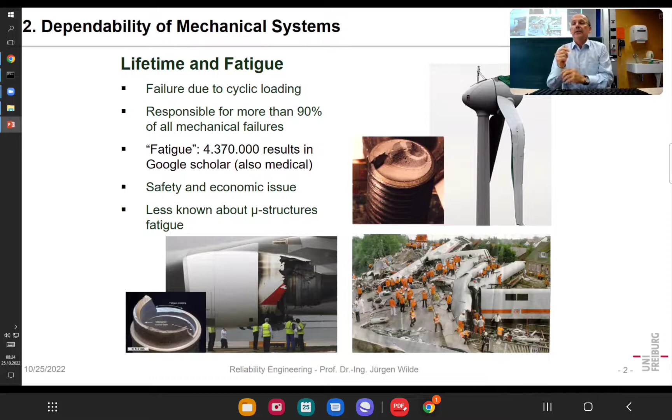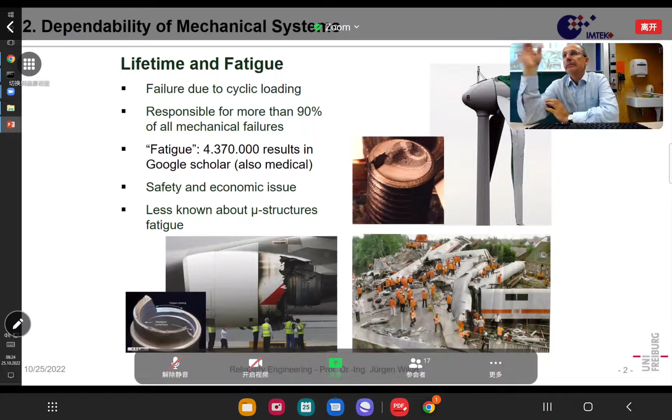That means it suddenly fails immediately, but the complete process of failure has taken considerable time. There are such examples for wind turbines, or here that is a jet engine. What can happen is that one of the rotor blades gets loose, because the support is breaking, and such a turbine has roughly 10,000 rotations per minute, so centrifugal forces are considerable. They can not only destroy that turbine, but can destroy the complete aircraft if they go inside the aircraft rather than outside. So that's very important.

When you look for fatigue, you find very many answers, for instance, in Google Scholar. Of course, fatigue is also a phenomenon in psychology or medical science, but here we talk about mechanical fatigue. It is said that fatigue is responsible for more than 90% of all mechanical failures.

Today we are going to deal with fatigue. What you see here is an accident at the end of the 1990s in Germany, somewhere near Hanover, in the northern part. Here an ICE crashed. You see it crashed completely. And that was also a fatigue problem.

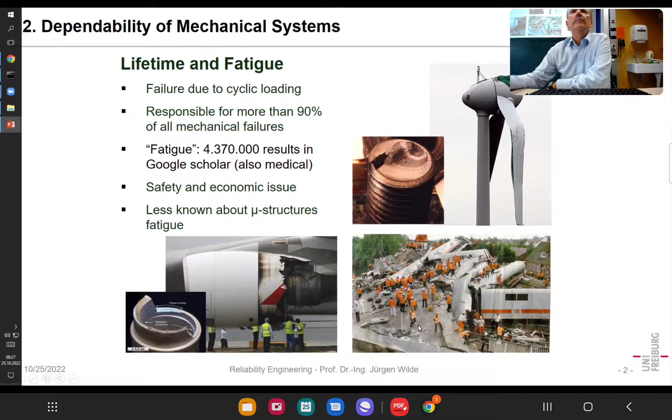The strange thing is that people thought fatigue in railroad applications was mainly solved by the end of the 19th century. Also, the theoretical foundation for treatment of fatigue was given, but anyway, 90 years later, again, such an accident appeared.

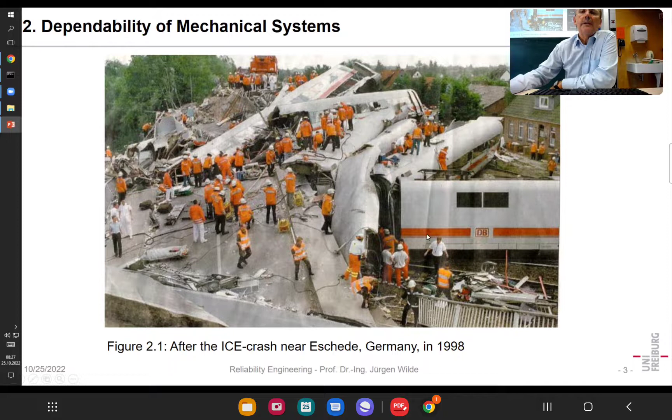Here you can see in more detail. Here's a small house, they have a garden, and suddenly you find such a car of the railroad in your garden. Here is a bridge, that bridge collapsed. That was the main thing which made the accident so severe, that the bridge collapsed on part of that train.

But now let's have a more detailed description. This was 1998, an ICE, the first generation. It had a speed of roughly 200 kilometers per hour, and what it had was a broken wheel.

That wheel was a two-part construction. That's a railroad wheel, maybe it's more round than shown here. Also, a wheel gets some kind of wavy surface over time, so it gets some ripples. Also, the rail gets ripples, and so from time to time it's turned down to make it smooth again. Otherwise, the ripples lead to much noise and discomfort.

Also, here in between is some rubber layer, and that rubber layer leads to the fact that the contact area has only a limited thickness. When it's turned down, it becomes thinner and thinner. And on the other hand, from the backside here, cracks developed.

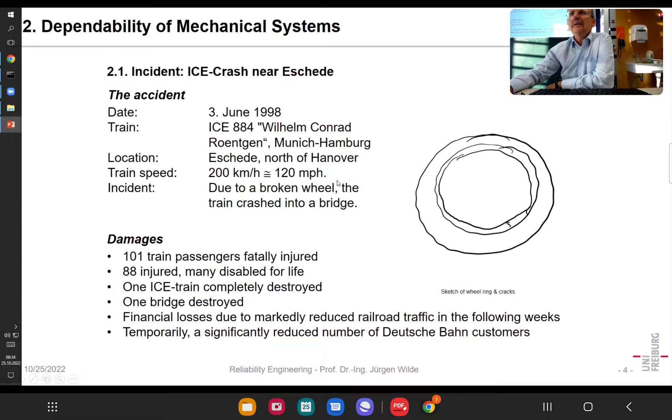So generally, if it's just a railroad wheel, you can say that was bad luck. But what will you say when something happens in a nuclear power station, which is much more complicated, and here it was just one mechanical part failing? I think that is something which should not have happened and could have been avoided.

The background is in the lecture notes. Now let's have a look at what fatigue is.

Normally when we test materials, we take some rod and pull on it, typically with a constant velocity, meaning a percent of strain per minute or so. Over time, as strain increases, the load goes up, and in almost any material you reach the ultimate tensile strength. Then it tears, and the force goes down because it's ripped apart.

This can depend on the material. For instance, a material with a higher Young's modulus evidently has less plastic deformation. So that's normally how materials are tested.

The first thing you say is, if a part is weaker than the force it has to tolerate, then it's no use. It would break immediately—you sit on that chair and it breaks down. So that's the first design criteria.

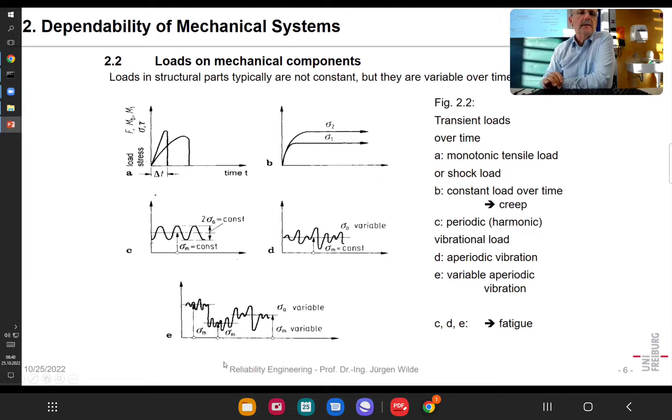So the question: will the loading type have an influence on lifetime and reliability? We have constant, monotonic, cyclic, or variable loads. What is a correct property which describes the load here? And what is fatigue also? These could be questions in an oral exam.

And yes, the load on a part is normally measured as a force in Newton. When we talk about material loads, we talk about mechanical stress, which is force per cross-sectional area. In that way, we are on a level where the strength of the material is relevant, not so much the breaking force of the part, because that is size dependent. And in that way, typically properties in mechanics are treated on the base of stress, Newton per square millimeter in German, or megapascal in English or international.

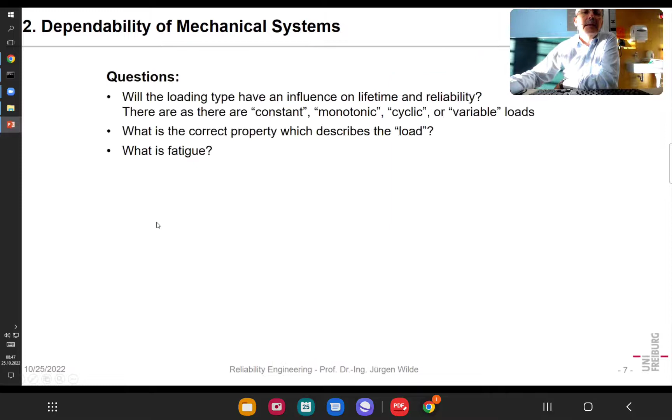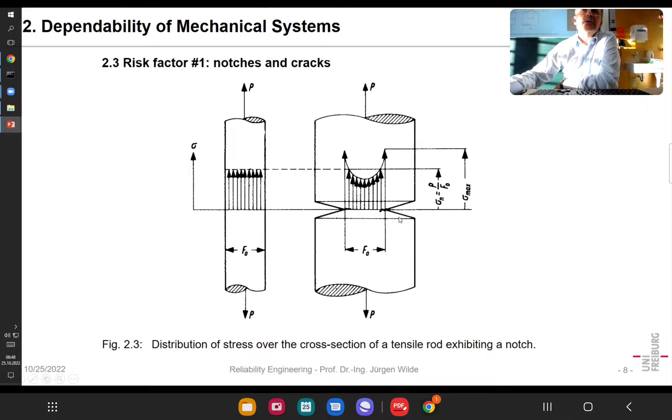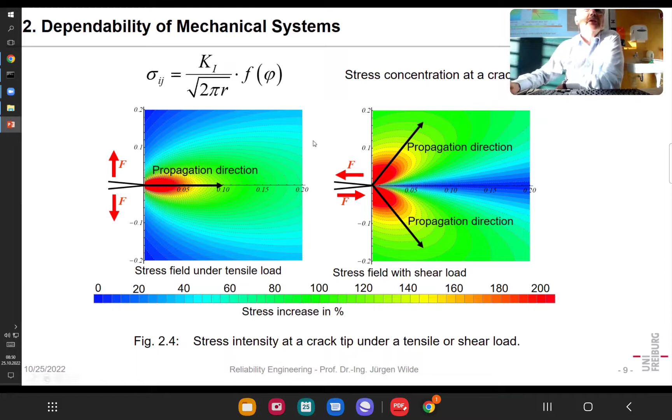I would not go into details because there are other lectures, especially on fracture mechanics, so that's not the aim here, but more to demonstrate that there is a big effect of such cracks. Again, here is that angle - we don't really need that formula.

What is maybe more important is that we have a stress vector. That's just when we take a 2D cut, so we have sigma x, sigma y, and some shear stress, all described by the so-called Sneddon equations. Sneddon was an Englishman who did that analytical calculation, I think around 1920 or so. What is important is, as I said, the stress is proportional to the inverse of the square root of the distance from the crack tip.

But on top of that, the stress scales with the nominal stress - that's just force divided by the complete area - multiplied with a factor that is the square root of pi times the crack length. In that way, that defines the stress intensity and the position around the crack, so that stress field can be computed.

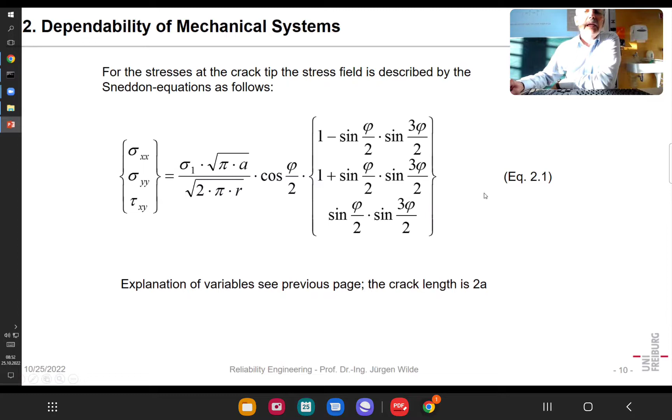Generally, you can say that stress concentration, with these geometry factors, can be described for all representative cases as the nominal stress multiplied with the square root of pi times the crack length - that's the length from the surface of the part to the tip of the crack. Q is a geometry factor depending on the special case. For us here, Q is by definition 1, but it can be between 0.7 and 2.5.

In that way, we have another failure criterion. Normally we say when the normal stress is higher than the ultimate tensile stress, it will fail. But if the part has a crack, it will fail when the K1 factor is larger than or equal to the K1C factor. Ultimate tensile strength is a material property, and K1C you can call the critical stress intensity, also called fracture toughness - that's a material property. So again, the criterion is: is the load higher than the strength, it will fail.

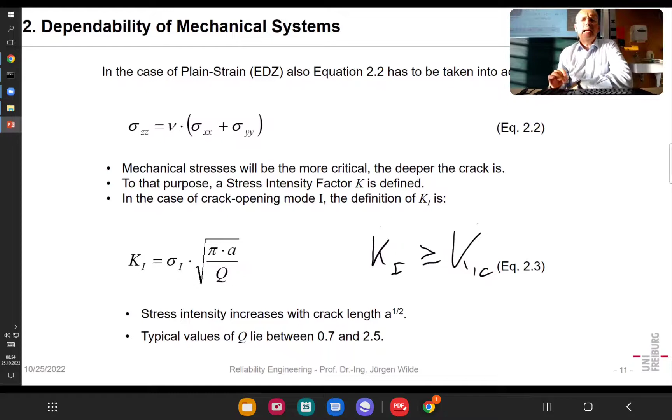Okay, here we have some examples. In fact, I'm not really working in mechanical engineering, but we did lots of work on strength of silicon. What's the strength of silicon? Does someone have an idea how many megapascal silicon can tolerate?

What do you think? Maybe we start with something different. That's also something you should know. You sit on a chair, and that is made of some steel pipe.

The strength of such a steel pipe in megapascal or in Newton per square millimeter - what's the strength of such steel? Give me a value.

Let's make it another way around. You have a string of steel wire, and you hang it here from the ceiling, and you put on a weight, 1 square millimeter of steel wire. How many kilos can you hang to it? Just give me an idea.

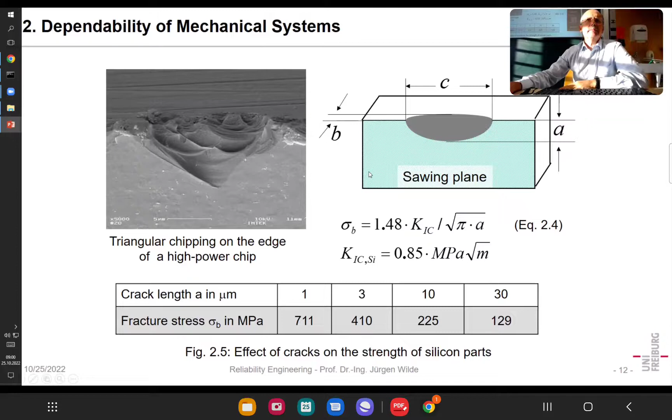And the second is we have the phenomenon of fatigue, and fatigue means we cannot just assume the ultimate tensile strength, but the value of strength which is tolerated is significantly lower. And when we still have a crack, it's lowered again.

So imagine you have a paper clip of, yeah, you know that paper clip, and you bend it. You can bend it a little and it snaps back, that's its task. You bend it too much and it snaps back only partly. That means you were beyond the yield point of that material. And still, when you really deform it, then you could break it. And the question is, why is in many constructions not the ultimate tensile stress used as a design criterion, but the yield strength of that material? Why is it so?

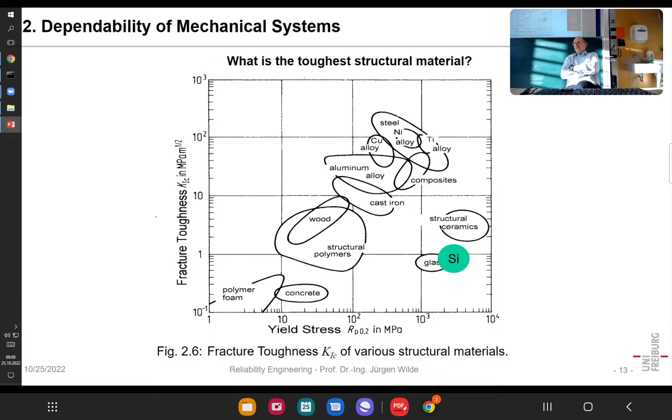The best nowadays are carbon fiber reinforced polymers. You can see that on Formula One race cars, for instance. Up to the 1970s, every season a few race car drivers were killed, and that doesn't happen anymore. One of the main reasons is the carbon fiber reinforced so-called monocoque construction, which is extremely strong and which can also be built in a way that it takes up a lot of energy. In that way, that's a safe construction.

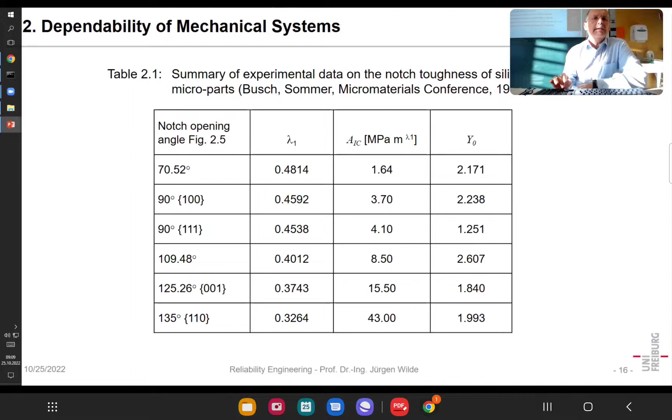Okay, we have seen that with the notches. I will go over that, that's not so important. But now let's come to fatigue.

There are two persons which are important - in the Anglo-Saxon area it's Mr. Basquin, and in Germany it's Mr. Wöhler. Wöhler did his work between 1870 and 1890 or so, and he worked in an office that was part of the railroad system. The main problems at that time were three: breaking of axles, breaking of wheels, breaking of rails, and the fourth thing is explosion of steel vessels.

Okay, the last is something like the action of a bomb, you could say. And that was all due to poor understanding of materials, not understanding the effect of cracks. Also, steels at that time were quite bad—they had many inclusions, and an internal inclusion is the same as a crack.

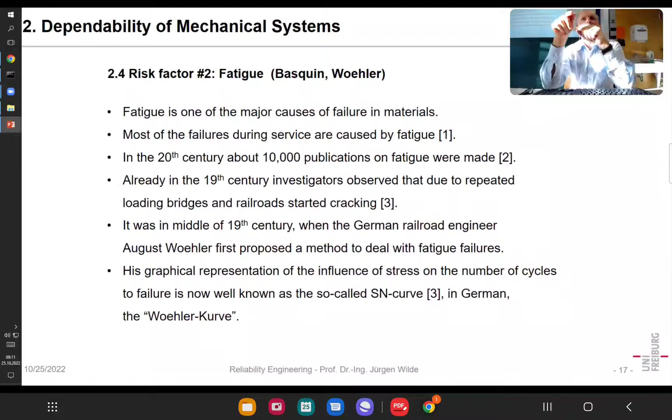That was important. By 1870, people didn't know anything about fatigue. Mr. Wöhler started from scratch. First of all, he thought about what it might be, and he built a machine in order to do dynamic testing. That means you can put an alternating load on a part, and depending on the load, determine how often you can have that loading and unloading, or reversion of the stress.

Here, the initial experiment was just to go to a positive and a negative stress—tension, compression, tension, compression. How do we accomplish that most easily? We can either take some bending bar and have it vibrate in some way, or we take a rod, bend it, and turn it at that time. And so we also get some symmetric tension-compression.

So, Mr. Wöhler found out, when you do your experiment, what is the stress level for the stress amplitude you start with? You cannot be larger than what? You cannot be larger than ultimate tensile strength. And you could also say, when you go to ultimate tensile strength, or better, yield strength, how many cycles will you have? You can have—you destroy it, so you have half a cycle.

That's not really fatigue, but you could say here your curve will start—half a cycle, yield strength. And then the stress is reduced, and you can already get—where is my mouse here? Here, you can get on that curve; when you want to investigate the material, maybe 7 specimens around that are already sufficient.

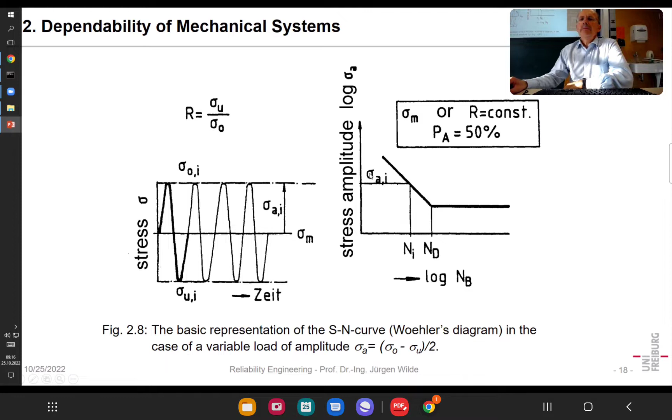More or less, you often find it—we will see more details. So generally in fatigue, what happens? Normally when you load it, you have a crack-free phase when it's a new material. And sometimes, as I said, you already have inclusions—for instance, some oxides or so in steels—and that means you do not have that crack-free phase.

But in a good material, you have it, and then after a certain time, you have crack initiation. Crack initiation means you have some surface profile where the step size of such a profile is in the micrometer region. You can see that, for instance, when you have a polished part of steel, which is really polished, and then after a certain time, you see some kind of weak pattern on the surface. And when this pattern becomes stronger, you get a crack, which is more a crack by definition.

You cannot say here that's a point where it's just that surface pattern, and here that's a crack—it's more a sliding transition. But in the end, engineers take something like an engineering crack, which means the part has already become a little weaker, a few percent weaker, and that is a crack by definition.

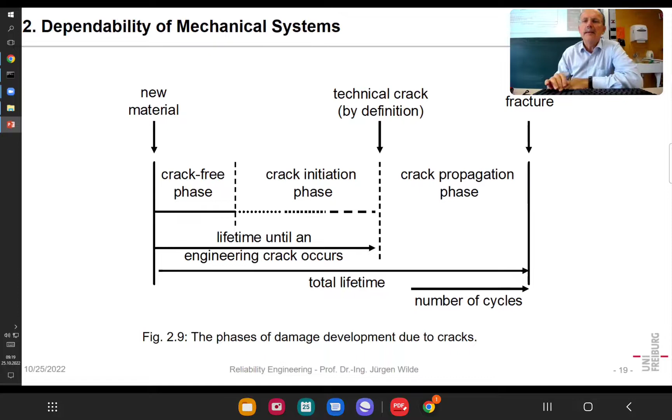So typically in a fatigue problem, you look at the cracked surface and you always find two areas: the fatigue area and the final crack area. And in that way, those are the phases of crack.

It's also interesting, depending on when we have a component with a crack, if we have some variable load, it can lead to fatigue or over time to creep. When we just pull, depending on the toughness, we have either a ductile fracture, meaning it takes lots of energy, or a brittle fracture, where all of the energy just goes into the crack. Ductile means all of the energy goes into the complete part. And what we can also have is something tricky: an arrested crack.

Where do we have cracks? In tension or compression? Yes, in tension. And sometimes in a 3D part, a crack runs into an area with compressive load - that's when we have a complex stress field. The crack just remains there because under pure compression, it cannot extend anymore. So that's an arrested crack. We have many possibilities.

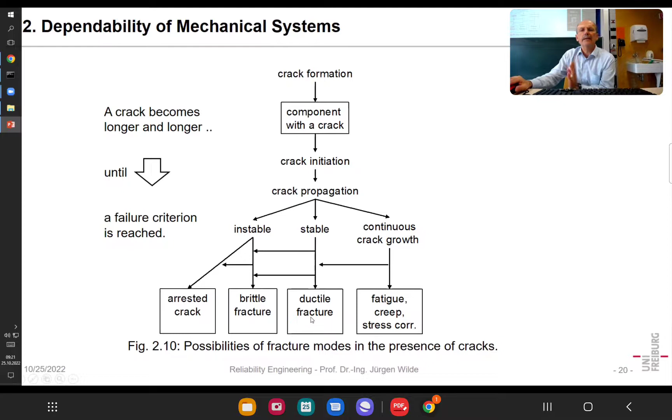So that's quite complex. In the end, we already have that curve. We can call it a Basquin's curve, or it's also often called an SN curve - stress versus number of cycles to failure. That stress level below which a part can live until eternity is the so-called endurance limit. Typically that starts from 1 million to 10 million cycles, or 10 to the power of 6 to 10 to the power of 7.

So here, in the beginning, you have something like the yield strength at half a cycle, and in that way, the endurance limit is often somewhere around 50% of yield strength. So in the end, when you know the yield strength of a material, you already have an idea of how the fatigue behavior will be. That's not really precise, but for a first guess, it's quite good.

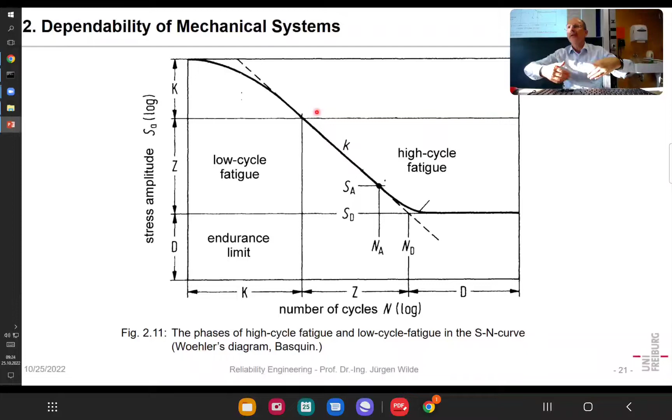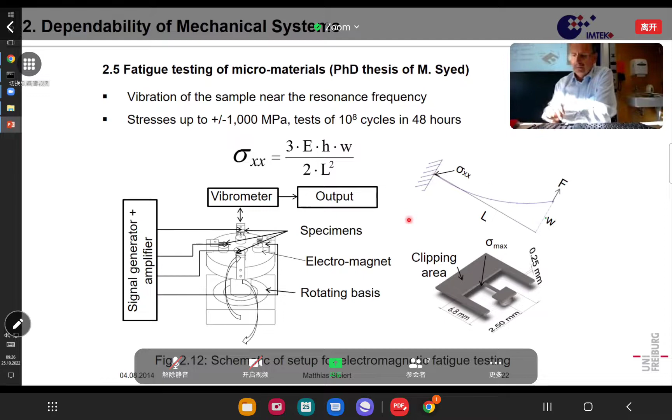How can you make an alternating stress? We had the idea to put some magnet and load it, unload it with a coil, just by magnetic forces. That works. Here we can see the maximum stress. We pull it down, press it down, and push it up just by that magnet which is put on here.

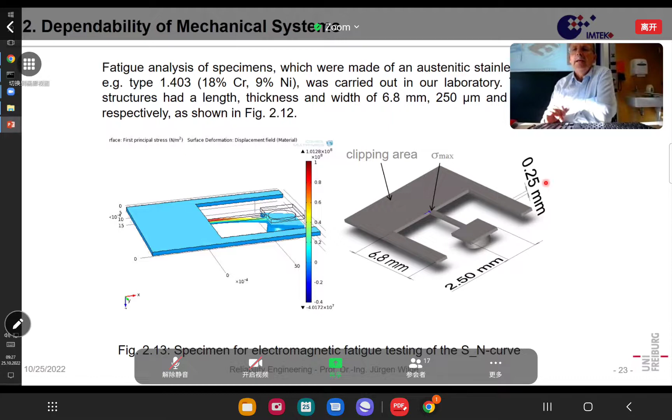It's also important, what you cannot see, the amplitude was measured with an optical vibrometer. That was important because otherwise the stress would have been too undefined. So in that way, we had very small parts, only a few millimeters. The thickness of that part was only a quarter of a millimeter in that case. And we did that test, and then he did several steels.

When you produce small steel parts, that steel 304 is something like a stainless steel. We wanted to investigate the effect of the machining. One was etched material, just in an acid with photolithography, and the second was electrical discharge machining. You have a wire, and that wire gives a spark against your part, and that spark takes out some cubic micrometers of material, and in that way you can machine it.

What you can see is the etched part was stronger than the EDM part, but the EDM was somewhat better, tolerating significantly more cycles than the etched steel. That's a little strange, because normally you'd expect the stronger steel, with 1,500 megapascal strength, to also be better at fatigue. But the surface has an influence, and probably that EDM process created some compressive stresses in the surface.

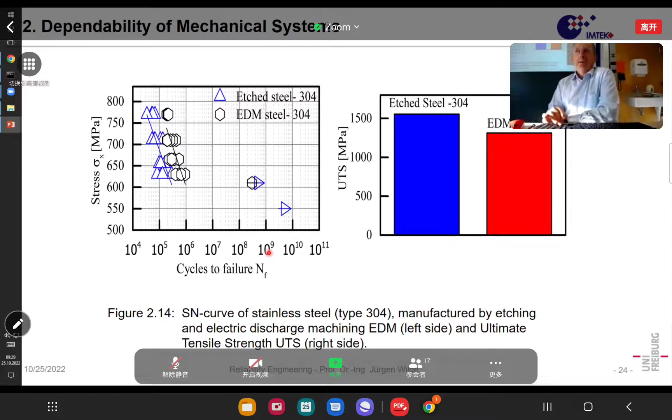On the other hand, the endurance limit is roughly 600. In that way you can clearly see for these two steels this curve. That point here was 550, I think that was not tested to the end. We just stopped because almost 10 to the power of 10 cycles takes a long time. Our machinery could test so many cycles because the frequency of testing was high. In a big part you'd have a frequency of a hertz or 0.1 hertz, and at 1 hertz you can hardly test 10 to the power of 9 cycles. But at 500 hertz, it accelerates it significantly.

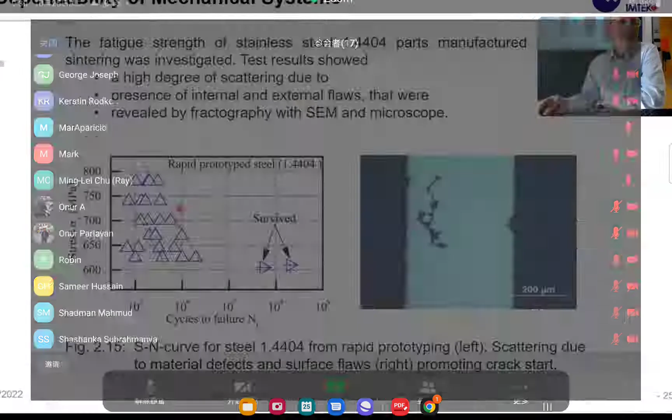Here was something different, a company using something similar to that 304 steel, a German one. Again, for the good ones, the endurance limit was very similar since it's a similar steel. But at higher stress levels, we had a very large scatter. That happened because it was a steel made by rapid prototyping, by laser writing a steel structure, and we found many defects in that material. The consequence was cracks or internal flaws, leading to very large scatter, almost 2 orders of magnitude in lifetime near the endurance limit.